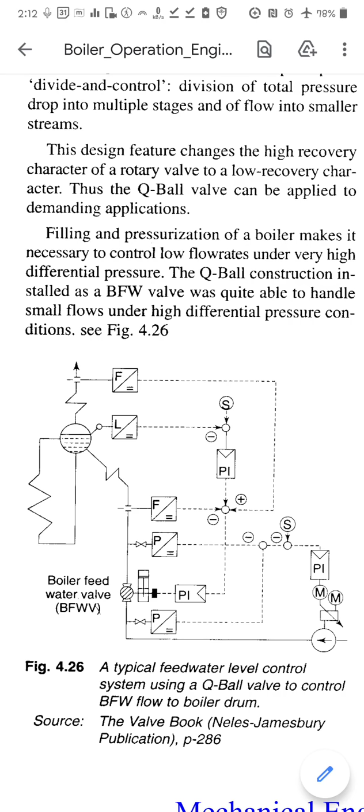In this diagram we can see a typical feed water level control system using a Q-Ball valve to control boiler feed water flow to the boiler drum. In this diagram we can see one single solid line. It is the feed water line. It goes from the right side to the boiler drum via the boiler feed water valve. This is the boiler feed water valve.

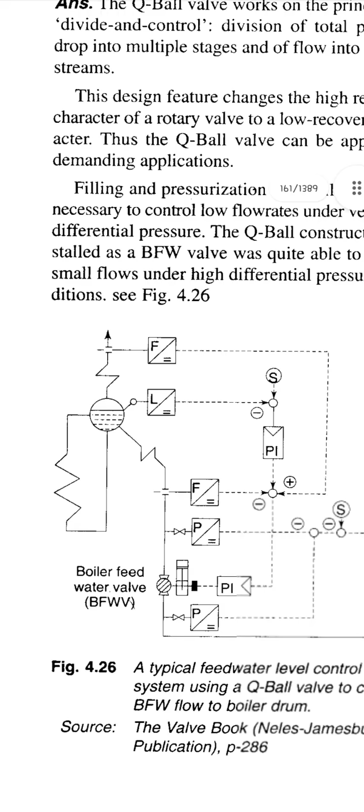It is controlled by flow transmitter, level transmitter and pressure transmitter feedback. And we can see the motorized valve. It is controlled by a level switch maybe. That is the logic. So this is the diagram.

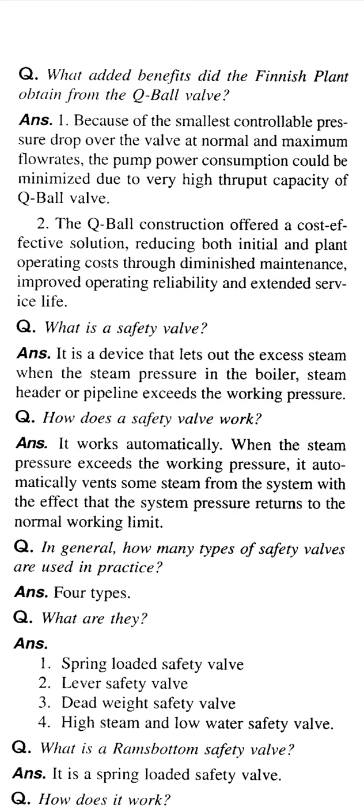First question: what added benefits did the Finnish plant obtain from the Q-Ball valve? Answer: because of the smallest controllable pressure drop over the valve at normal and maximum flow rates, the pump power consumption could be minimized due to the very high throughput capacity of the Q-Ball valve.

2. The Q-Ball valve construction offered a cost-effective solution, reducing both initial and plant operating costs through diminished maintenance, improved operating reliability, and extended service life. Next question: what is a safety valve? Answer: it is a device that lets out the excess steam when the steam pressure in the boiler, steam header, or pipeline exceeds the working pressure.

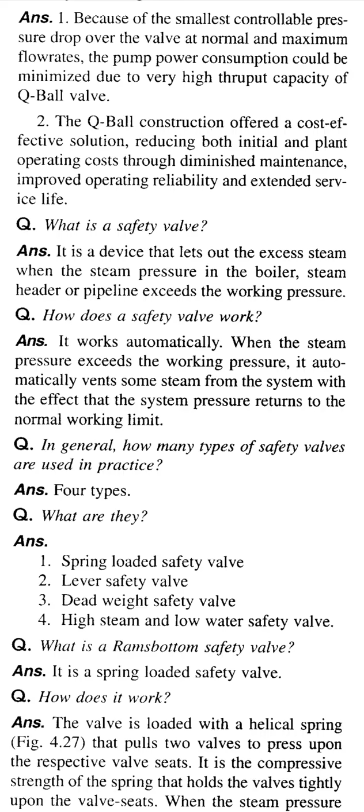Question: how does a safety valve work? Answer: it works automatically. When the steam pressure exceeds the working pressure, it automatically vents some steam from the system with the effect that the system pressure returns to the normal working limit. Question: in general, how many types of safety valves are used in practice? Four types: spring loaded safety valve, lever safety valve, dead weight safety valve, high steam and low water safety valve.

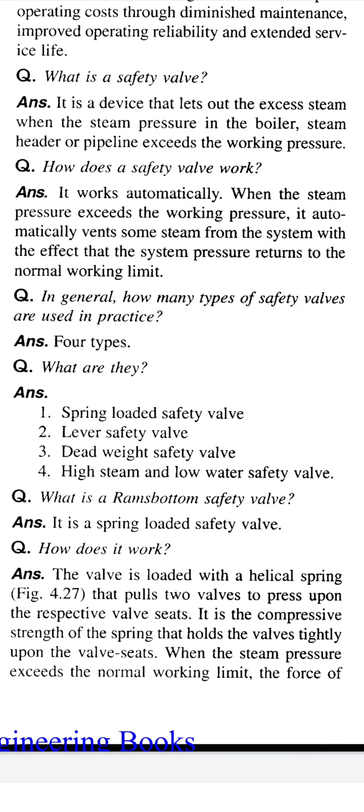What is a Ramsbottom safety valve? It is a spring-loaded safety valve. How does it work? Answer: the valve is loaded with a helical spring that pulls two valves to press upon the respective valve seats. It is the compressive strength of the spring that holds the valves tightly upon the valve seats.

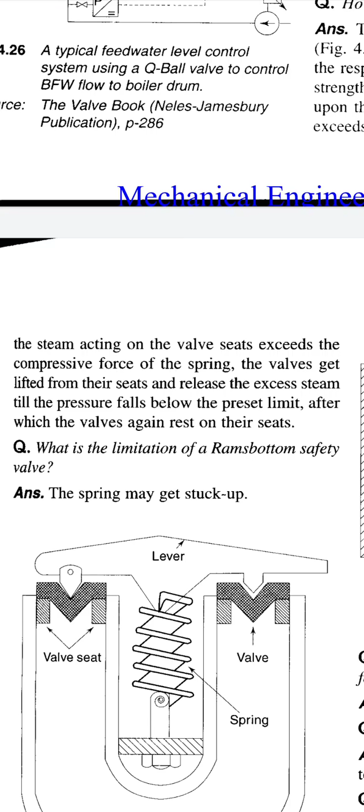When the steam pressure exceeds the normal working limit, the force of the steam acting on the valves on the valve seats exceeds the compressive force of the spring. The valves get lifted from their seats and release the excess steam till the pressure falls below the preset limit, after which the valve again rests on the seats.

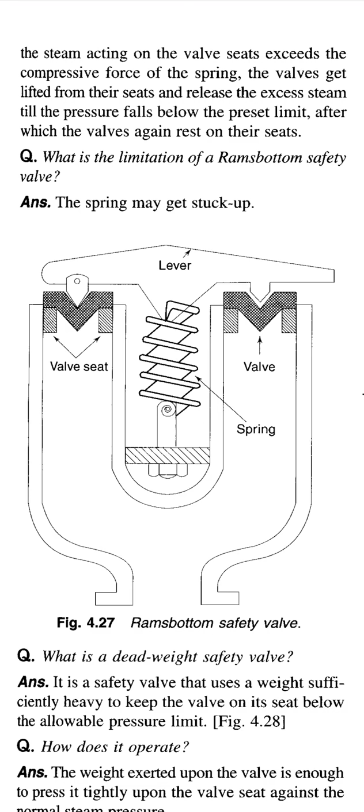Question: what is the limitation of the Ramsbottom safety valve? The spring may get stuck. It is very dangerous. In this diagram we can see the Ramsbottom safety valve. We can see the helical spring and lever which are connected to the valve seats and valve.

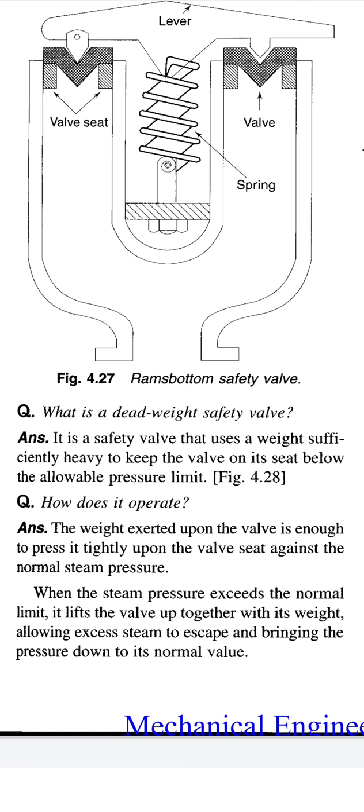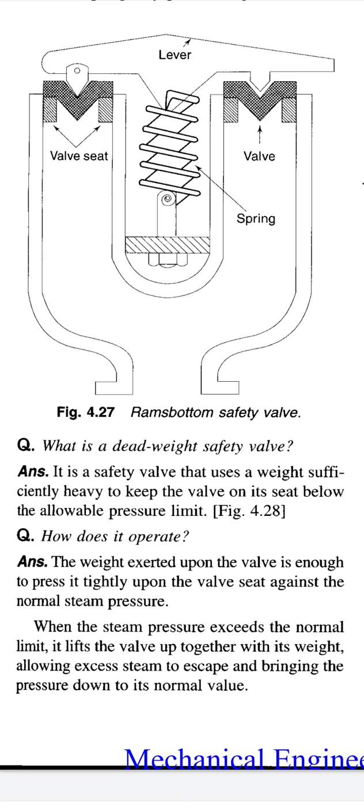Next question: what is a dead weight safety valve? Answer: it is a safety valve that uses a weight sufficiently heavy to keep the valve on its seat below the allowable pressure limit. Question: how does it operate? Answer: the weight exerted upon the valve is enough to press it tightly upon the valve seat against the normal steam pressure. When the steam pressure exceeds the normal limit, it lifts the valve up together with its weight, allowing excess steam to escape, bringing the pressure down to its normal value.

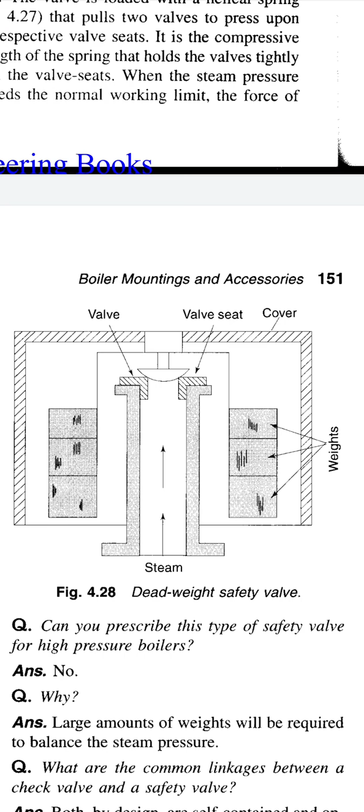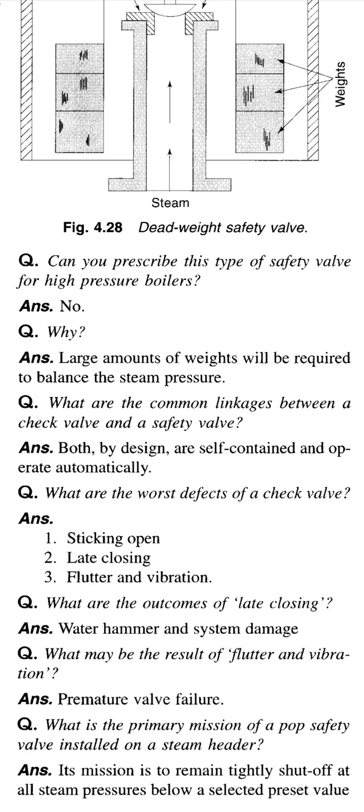In this diagram we can see the dead weight safety valve. We can see the weights and valve seat and cover. The weights keep the valve shut, and the steam we can see goes from the bottom to top. The next question: can you prescribe this type of safety valve for high pressure boilers? Answer: no. This type of safety valve we cannot prescribe. Question: why? Answer: a large amount of weights will be required to balance the steam pressure.

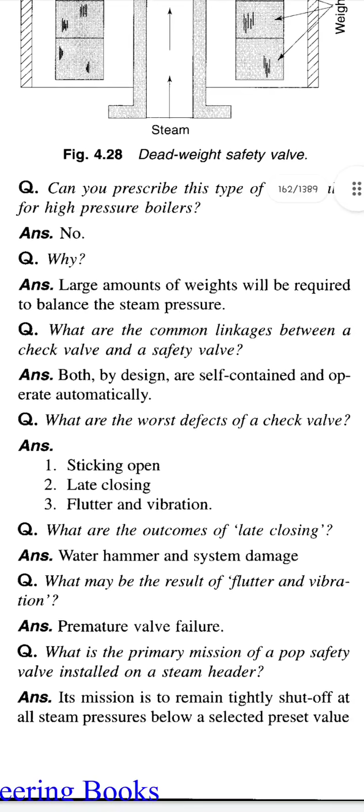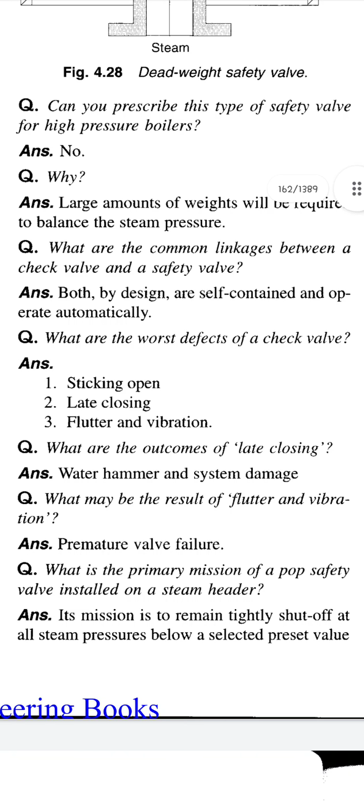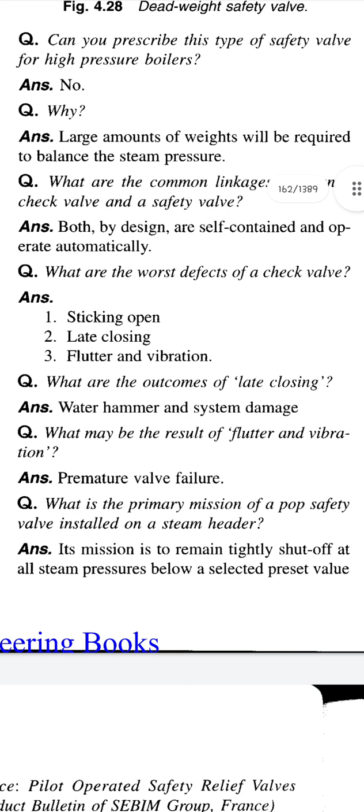Question: what are the common linkages between a check valve and a safety valve? Answer: both by design are self-contained and operate automatically. Question: what are the worst defects of a check valve? Sticking open, late closing, flutter and vibration. Question: what are the outcomes of late closing? Answer: water hammer and system damage. Question: what may be the result of fluttering and vibration? Answer: premature valve failure.

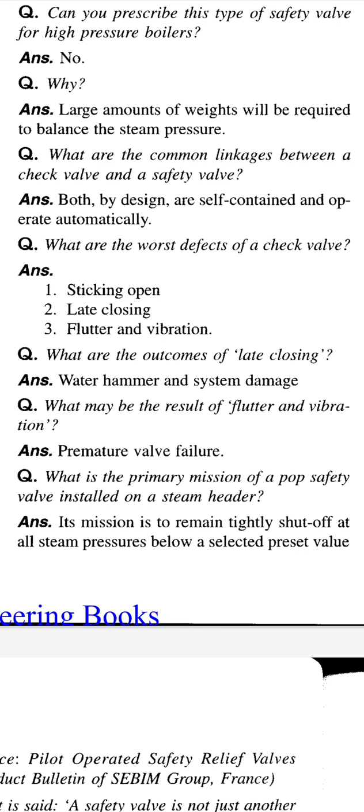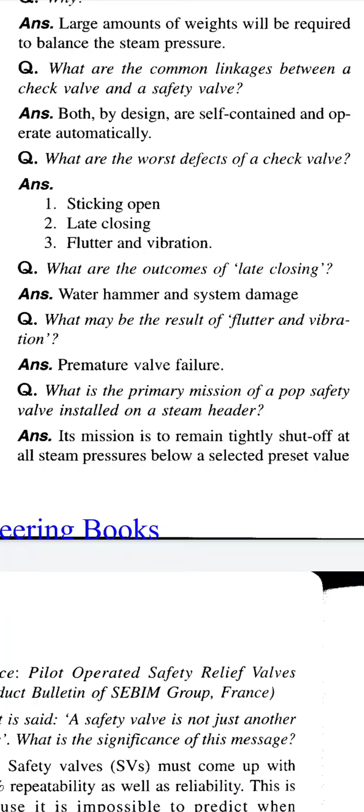Question: what is the primary mission of a pop safety valve installed on a steam header? Answer: its mission is to remain tightly shut off at all steam pressures below a selected preset value, and at precisely that pressure to open wide instantly and to vent rated flows of steam until the header pressure drops a few percent below the set pressure.

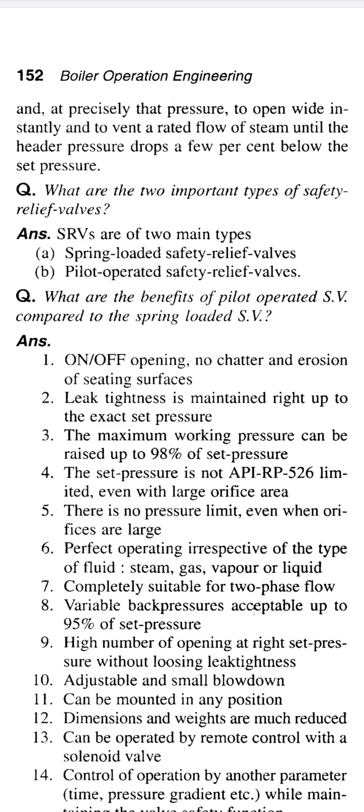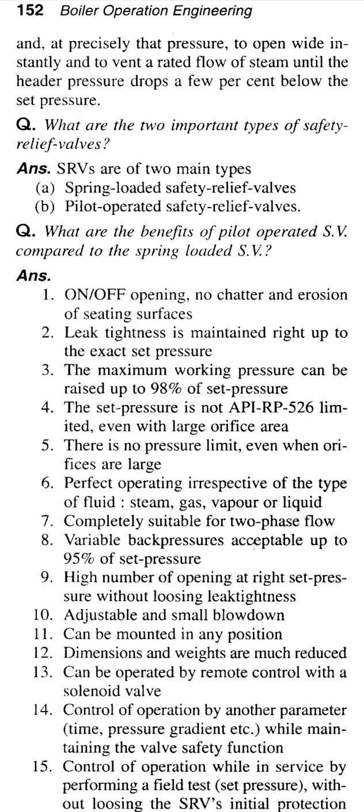Question: what are the two important types of safety relief valves? Answer: SRVs are of two main types. 1. Spring loaded safety relief valves. 2. Pilot operated safety relief valves. Spring loaded, pilot operated. Question: what are the benefits of a pilot operated safety valve compared to the spring loaded safety valve? Answer: these are the benefits of pilot operated.

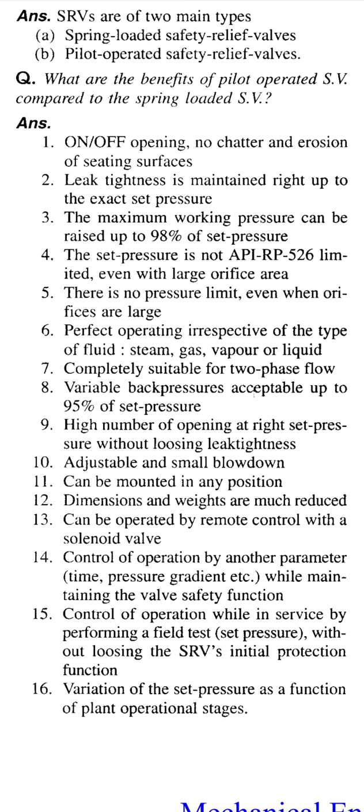1. On-off opening, no chatter and erosion of seating surfaces. Leak tightness is maintained right up to the exact set pressure. The maximum working pressure can be raised up to 98% of set pressure. The set pressure is not API RP 526 limited even with large orifice area. There is no pressure limit even when orifices are large. Perfect operating irrespective of the type of fluid: steam, gas, vapor or liquid.

Fifth point again, there is no pressure limit even when orifices are large. Sixth, perfect operating irrespective of the type of fluid: steam, gas, vapor or liquid. Completely suitable for two-phase flow. Variable back pressures acceptable up to 95% of set pressure. High number of openings at right set pressure without losing tightness. Adjustable and small blowdown. Can be mounted in any position. Dimensions and weights are much reduced.

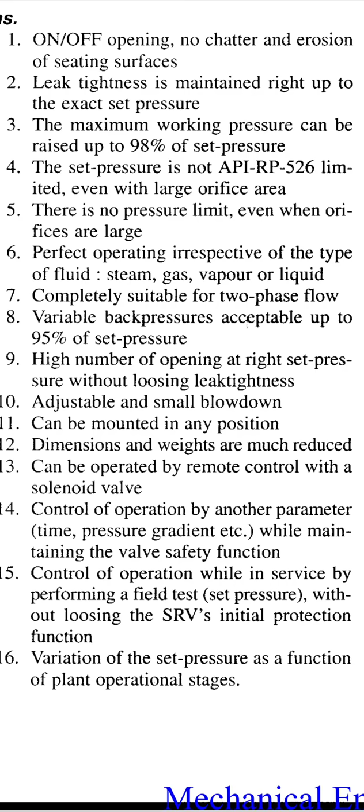Can be operated by remote control with a solenoid valve. Control of operation by another parameter, time, pressure, gradient, etc., while maintaining the valve safety function. Control the operation while in service by performing a field test of set pressure without losing the SRV's initial protection function. Variation of the set pressure as a function of plant operational stages. Source: pilot operated safety relief valves, product bulletin of Sebim Group, France.

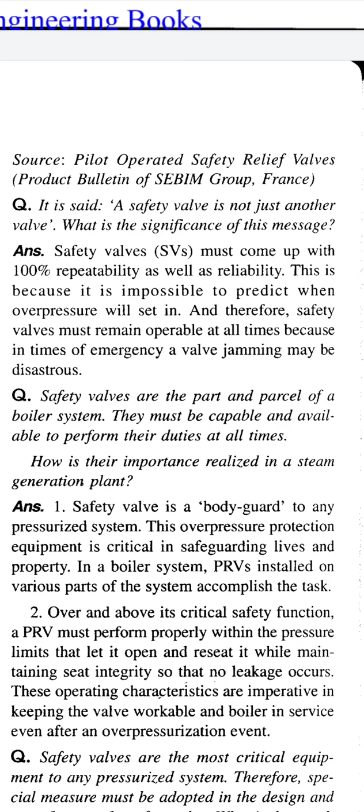So the next question. It is said a safety valve is not just another valve. What is the significance of this message? Answer: safety valves must come up with 100% repeatability as well as reliability. This is because it is impossible to predict when overpressure will set in, and therefore safety valves must remain operable at all times, because in time of emergency a valve jamming may be disastrous.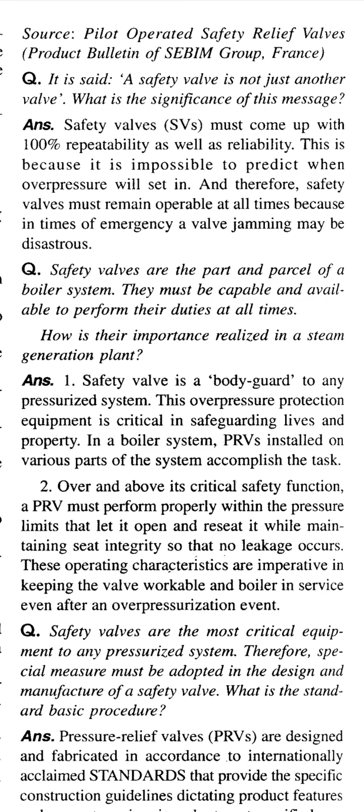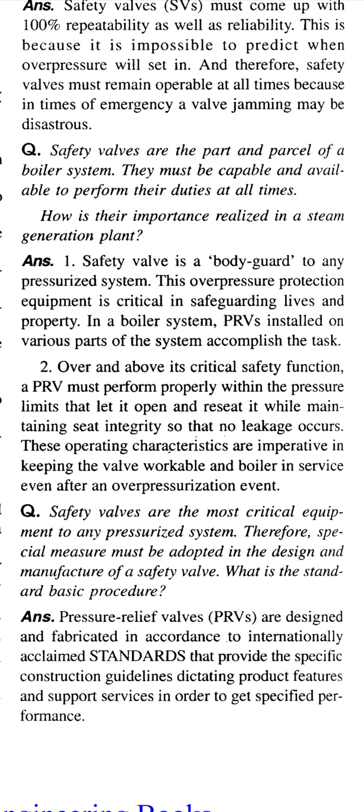Question: safety valves are part and parcel of a boiler system. They must be capable and available to perform their duties at all times. How is their importance realized in a steam generator plant? Answer: a safety valve is a bodyguard to any pressurized system. This overpressure protection equipment is critical in safeguarding lives and property. In a boiler system, PRVs are installed on various parts of the system to accomplish the task. Over and above its critical safety function, a PRV must perform properly within the pressure limits that let it open and reseat while maintaining seat integrity so that no leakage occurs. These operating characteristics are imperative in keeping the valve workable and the boiler in service even after an overpressurization event.

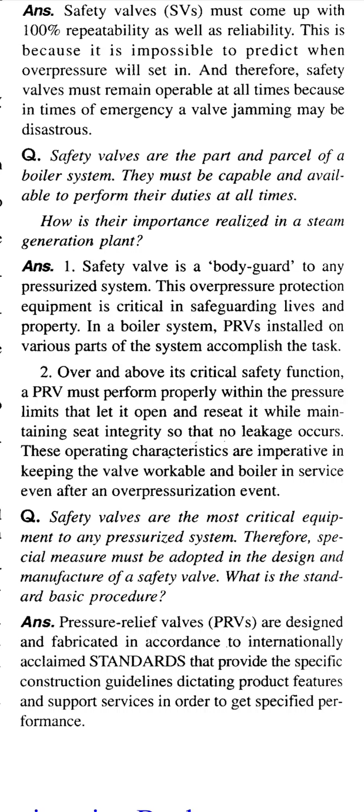Question: safety valves are the most critical equipment to any pressurized system. Therefore, special measures must be adopted in the design and manufacture of a safety valve. What is the standard basic procedure? Answer: pressure relief valves are designed and fabricated in accordance with internationally acclaimed standards that provide the specific construction guidelines dictating product features and support service in order to get specified performance.